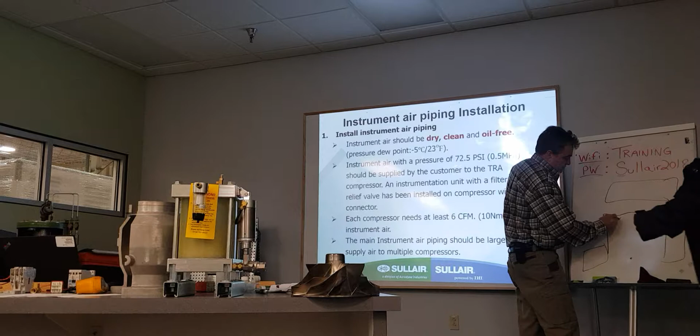You're gonna bring a line over to here, and bring it down to the compressor, say it's a half inch. And you're gonna run a bunch of compressors, two or three compressors off of this.

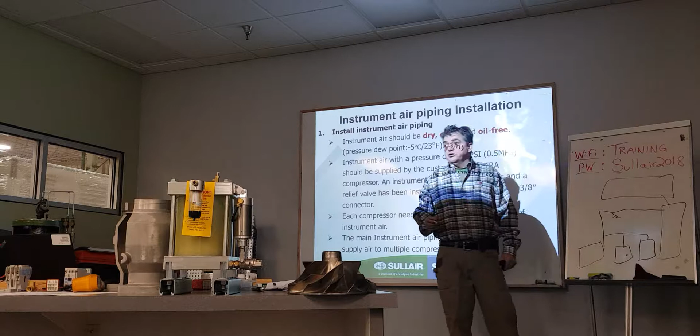Would you want your compressor air system to be tied into this tank? Would you want to use that as your air signal for your system? And if you would, what could you do so you could do that with one pipe?

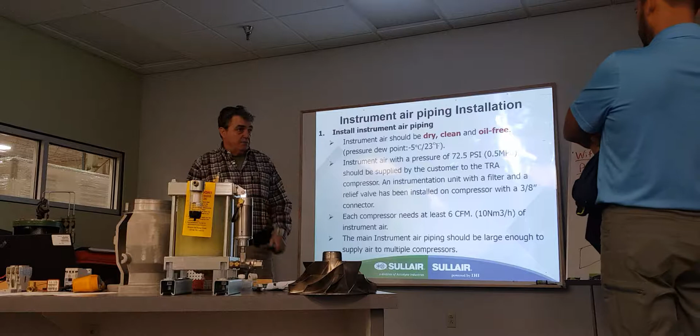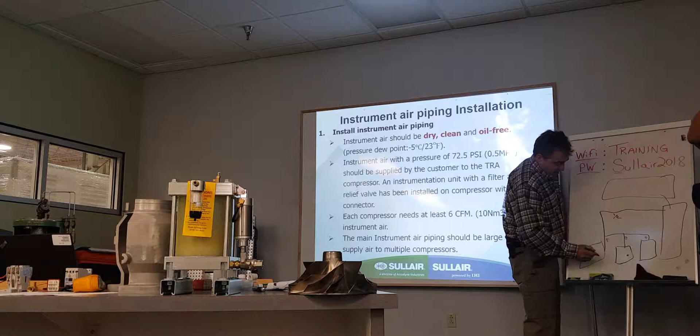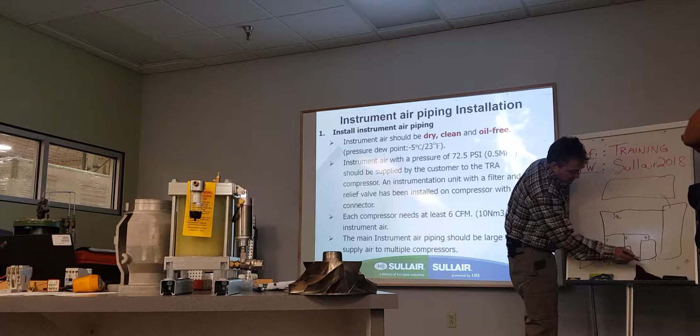This is 6 CFM, and this is 6 CFM, and this is 6 CFM. Now you have drain, drain, drain, drain, plus you have another 6, 6, 6. Now you have your BOCV, you've got 3 of them, 1, 2, 3, coming off of this.

Now you have all of these being pulled off of this line right here, right? You still want to pull off of this line a dedicated air line to this, to this, to this for your air system.

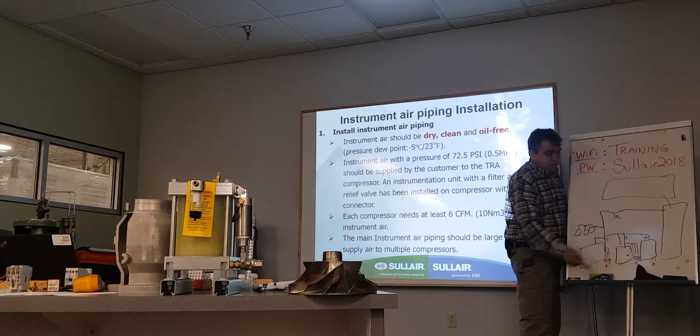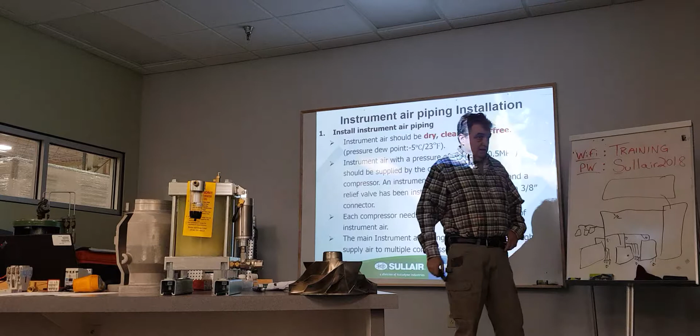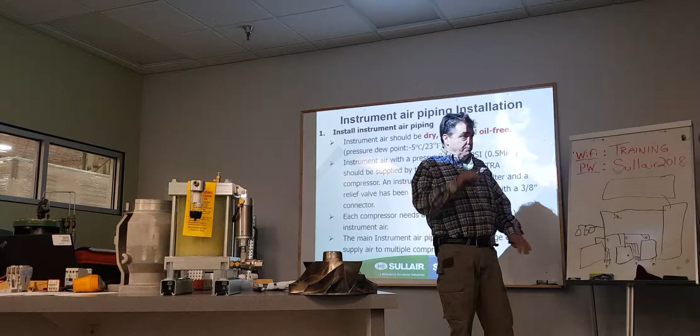No, I don't. You don't agree? No, because when it's a half inch, it's not tight, so what happens? You're going to have pressure fluctuation. Yeah, different pressure. Okay, explain. Got it? Thank you, yeah, I got it.

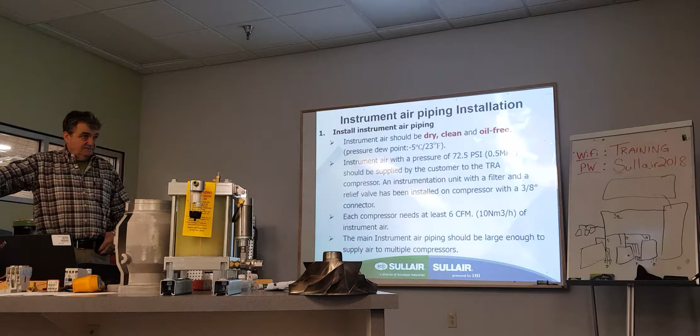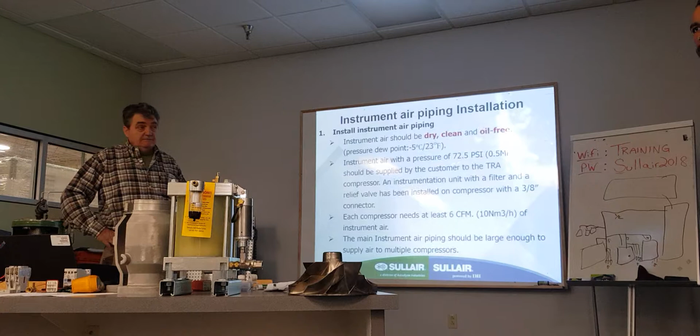So, how to fix that? What do we do at Lala? Lo que se hizo en Lala fue poner un tubo bastante grande. We ran a big pipe, 2 inches wide. Se puso un tubo desde el sistema de 2 pulgadas.

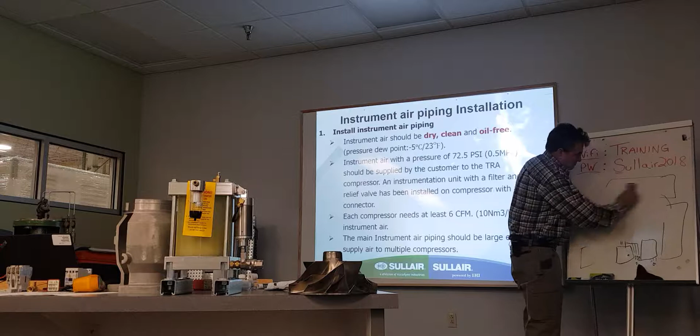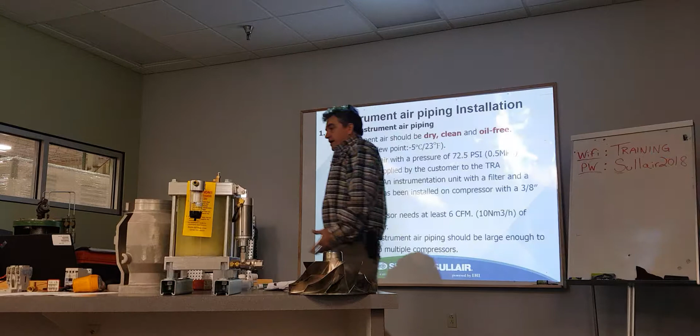Important, because customer always wants to run one dedicated small line, thinking 3/4 or 1 inch. And all those BOV, CV, the auto block valve, the drains, all running off of that small line, pulling the air pressure. So try to make it dedicated if you're gonna do a system air pressure.